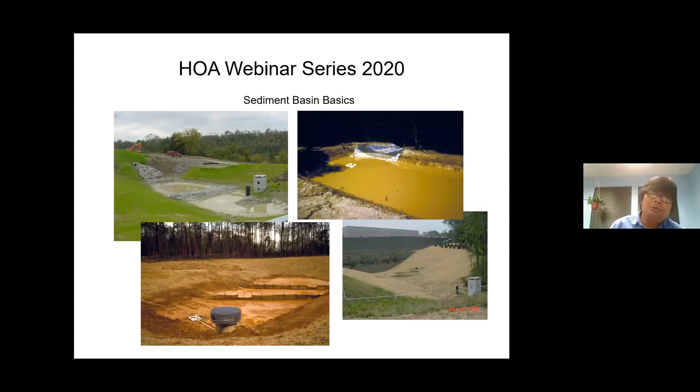So with that said, what we do with sediment with basins, these structures start out during construction. We use these as sediment basins. The reason for that is that the Ohio EPA mandates that sediment settling ponds are required where stormwater collects or concentrates during construction.

So what we do is we retrofit these detention basins with a slow release device called a skimmer that is to regulate the discharge of muddy water that's run off from the construction sites, and it's supposed to hold it and draw it down with a minimum of 48 hours. These skimmers and sediment basins must be installed and functioning within 7 days of grubbing on a construction site.

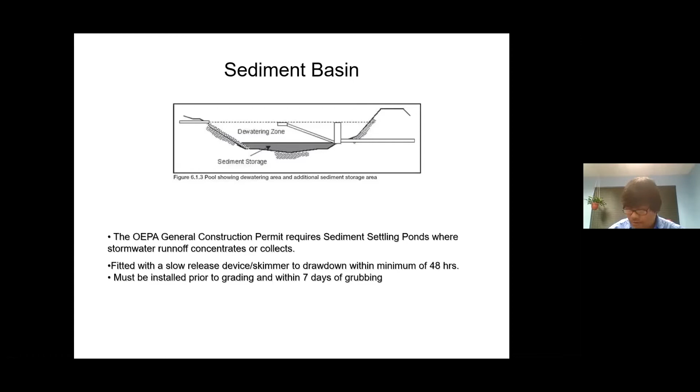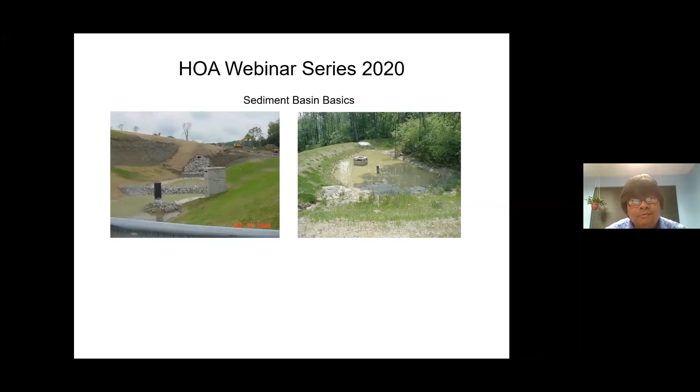I just want to illustrate a couple of pictures of a working sediment basin. That pipe sticking out is the slow release device that controls the discharge of water from the basin. Basically it allows the muddy water, sediment from the muddy water, to settle down and be captured in the basin and not be released into the streams. These pictures just illustrate how much sediment can really be captured in those sediment basins.

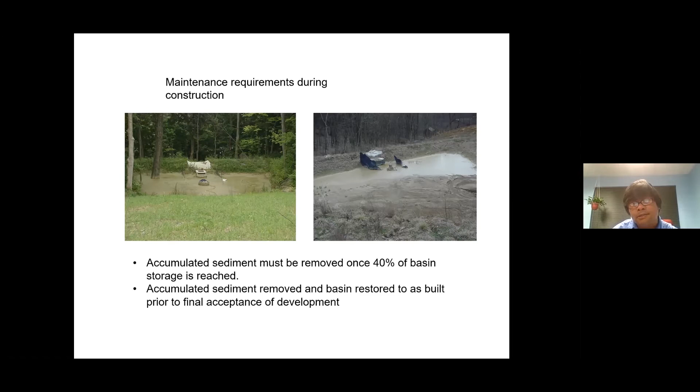We do have guidelines on when they should be maintained. One is the accumulated sediment must be removed once the sediment has reached 40% of the storage volume of the basin. The other trigger for maintenance would be when the sediment must be removed and the basin restored to an as-built condition prior to the final acceptance of the development.

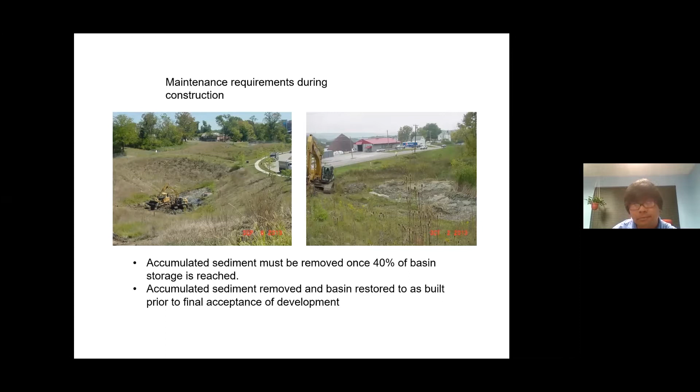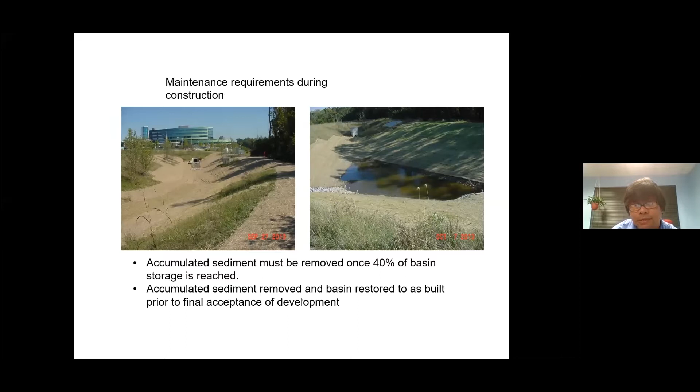Just a couple of pictures illustrating how this basin maintenance is sometimes a very involved task, needing the right conditions and the proper equipment. But that is how we want to leave these basins when we are done with them on a construction site. So with that, I would turn it over to Ben, and Ben would be the person that will discuss the functions and maintenance of these basins. Thank you.

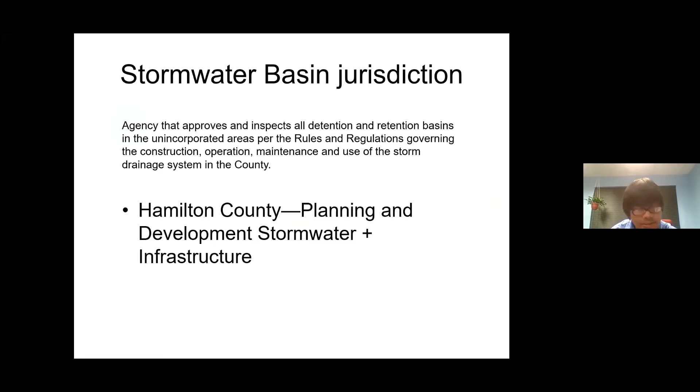All right, thanks, Jay. I am Ben Poole. I'm with Hamilton County Planning and Development, and my main role is stormwater plan review for all new developments in Hamilton County, as well as dealing with different inspection aspects of basins once they're completed. Let me pull up my screen here.

So I'll start with what is a detention basin. This kind of goes off what Che was talking about with sediment basins, which are only used during construction. Once we get towards the end of a construction project and the land has been stabilized with vegetation and grass, so there's less erosion, they will transform it into a detention basin and clean out the sediment, and that'll be its permanent use from now on.

Detention basins are used to capture the runoff from a development, usually through the storm sewers, or they can be directed there from surface flow of water.

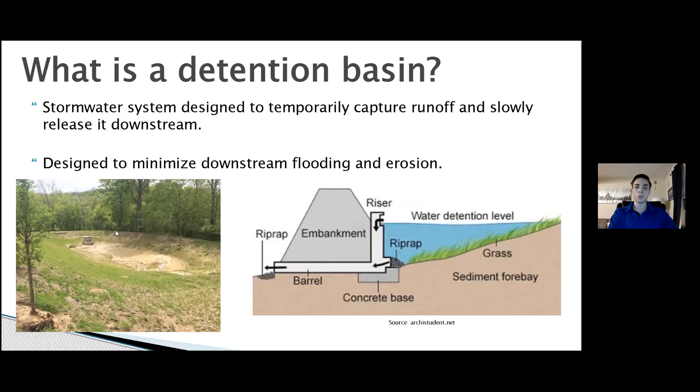There's a pipe that goes under the dam, and it will let the water go where it was previously flowing, usually to a small stream or creek, or sometimes to other storm sewers if it's closer to an urbanized area.

Detention basins are needed because with urbanization and new developments, you go from grass, trees and bushes, where a lot of water infiltrates into the ground and is used by the plants, to roofs, sidewalks, roads, etc., where the water runs off and goes to storm sewers a lot faster. There's also a larger volume of runoff because there's not that infiltration into the ground.

And also there is the issue of pollutants, whether that be trash, sediment, like Jay was talking about, oil, or say fertilizer from lawns. That's all stuff that you don't want to be getting into the waterways.

Generally we'll have three different detention basin types and subdivisions. I'd say 90% of the basins, especially in Hamilton County in a subdivision, are going to be a dry pond detention basin. Within a few days of a rainstorm, these by design should be totally dried out, and they will only have water during rain events or shortly after.

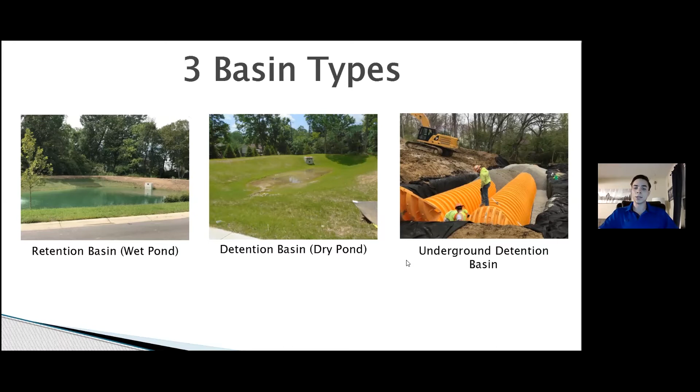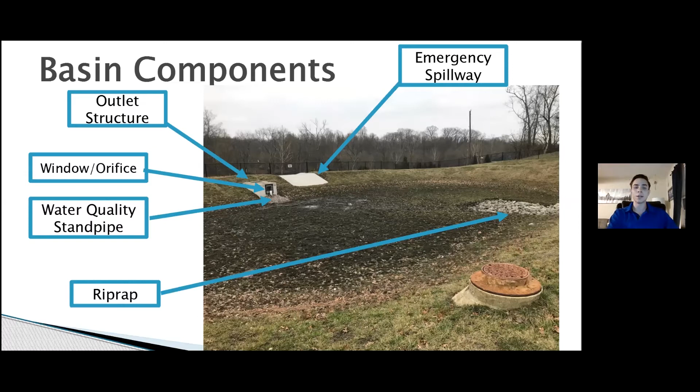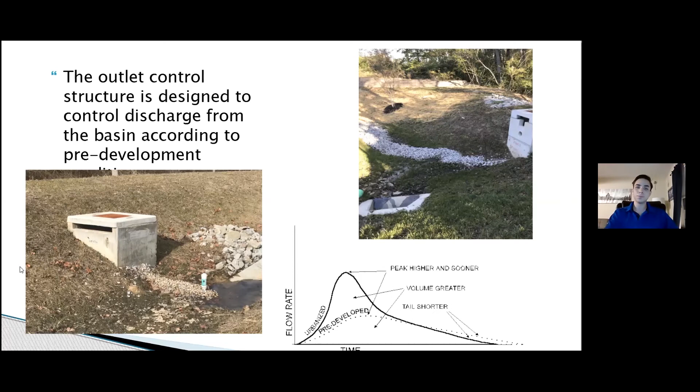Basins in Hamilton County, Ohio, and really all over can be designed for stormwater quantity runoff control, which is for flooding primarily and erosion, and these will normally let out more water faster. We also have water quality, designed to hold water in longer to get more sediment and pollutants out before releasing that water downstream of the development. Now all developments over 1 acre in Ohio are required to design for water quality.

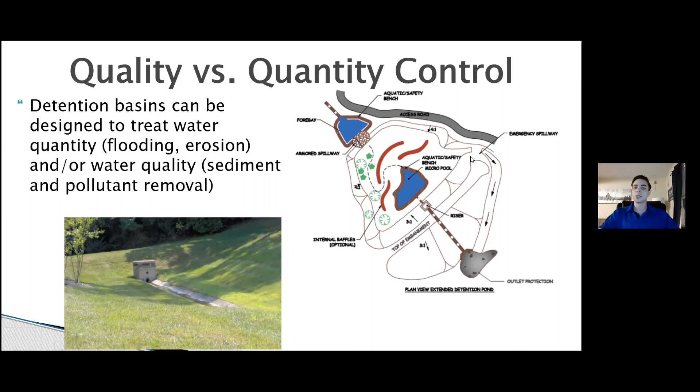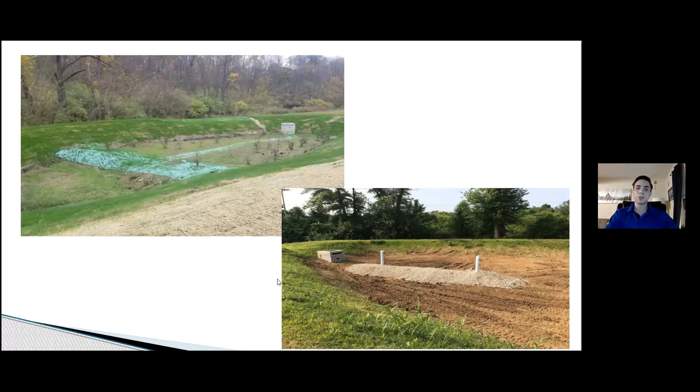So who is responsible for these basins? In Hamilton County, all detention basins are owned by either the property owner where it's sitting, or an HOA if it's in a subdivision. In 2007, we changed our regulations to require an HOA to be responsible, required for all new subdivisions. Before 2007 that wasn't the case, and there shouldn't be any after that. But before, there will be some subdivisions where a detention basin is the responsibility of the whole HOA, and others where just the property owner who owns that lot would be responsible. This is determined by the subdivision record plat, which is on file at the Hamilton County Recorder's Office, or the Recorder's Office for other counties or jurisdictions if you're not from Hamilton County.

These can also be found online, and I'll talk about that in a little bit, or if you needed help finding them for your subdivision, you could contact my department and we could help you out with that.

Now we'll get to some common issues with detention basins. They all kind of build off each other in a way, and maintenance overall can be less of a big deal if it's more frequent minor stuff, just keeping an eye on the basin, rather than letting it go for 2, 5, 10 years and then trying to fix it all at once. The main issues are normally overgrown vegetation in the basin and around the outlet structure, and also trash and debris, because anything in somebody's yard next to a drainage swale, or in the street, that gets washed down into the sewers is going to end up in the detention basin.

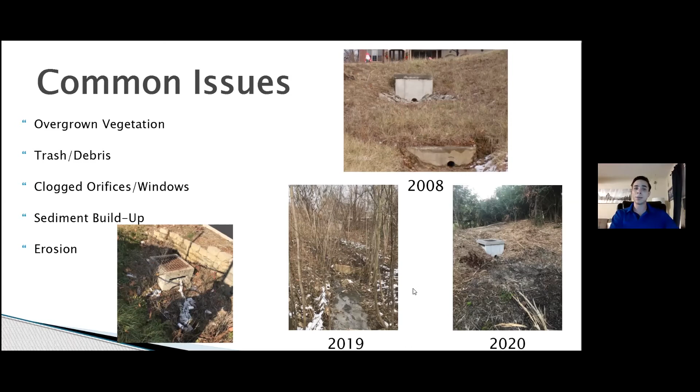So this kind of touches on what I said earlier, that frequent inspections and routine maintenance can prevent the more expensive and bigger problems down the road.

What we typically suggest is monthly inspections, and then after any large rain event or storm, go inspect the outlet structure and the pipe downstream and any of them in the basin, just to make sure nothing has washed into them or clogged it up. Then also a few times a year, and again after large storms, inspect for trash, debris, big tree branches, anything like that, and clean it out of the basin so it doesn't clog anything up or cause issues. Also look for erosion, sinkholes, animal burrows, and check the dam.

Those can cause issues if they're not caught, and could eventually cause dam failure. If you see erosion where there's no grass, it's as simple as filling it in and putting some grass seed on it. Or if it looks serious, you may need to have an inspection done.

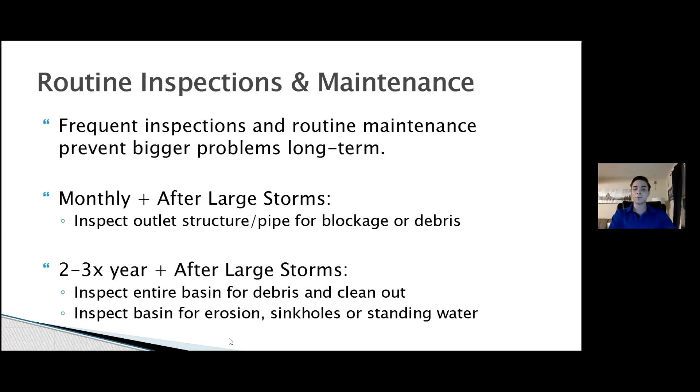For vegetation management, if it's a grass basin, which most of them are, it's good to mow it a couple times a year and not let it get too out of hand, because more vegetation can clog things up more. But you don't want to cut it too short either, because longer grass provides more filtration and also decreases the likelihood of erosion in the basin.

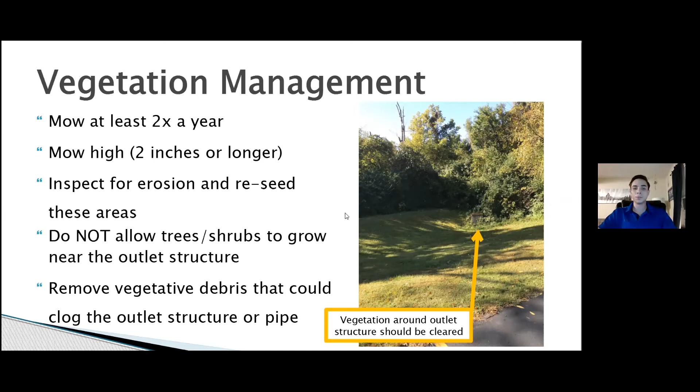Then there's sediment removal, which typically, no matter what, needs to be done every 5, 10, or 15 years. That depends on where the basin's located, how big of an area is draining to the basin, and how much sediment is getting in there.

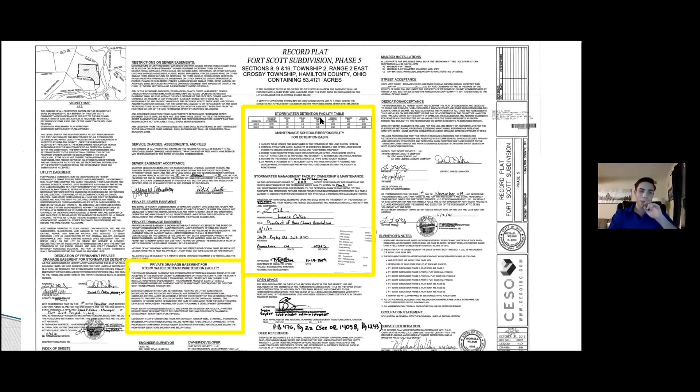And then additionally, at the end of each project - getting ahead of myself - this is the second page of that same record plat from the previous slide. This shows all the lot lines, the street here, and the private drainage easement.

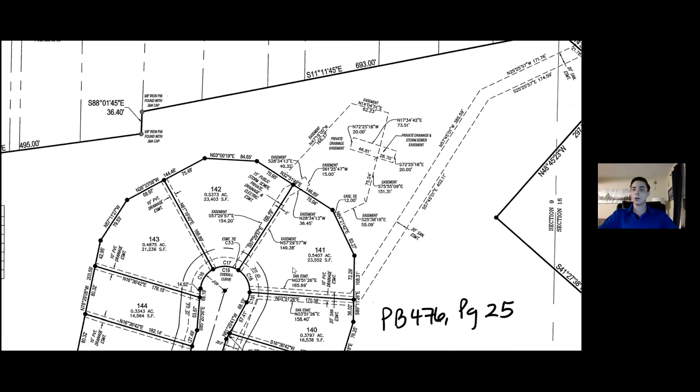So really, if you're wondering if there's any storm sewers or drainage swales on your property, they should have an easement from when the subdivision was designed, and these would all be shown on the record plat for your subdivision. And then lastly, for each subdivision and detention basin, before we accept it, we require an as-built of any public storm sewer and any detention basin.

So any basin within likely the last 20 years, we would have an as-built on file. And if not, we would be able to find some plans, so we would at least know what was approved with the design of the subdivision. And so this would be useful if you ever needed maintenance done or just to check and make sure everything's all right.

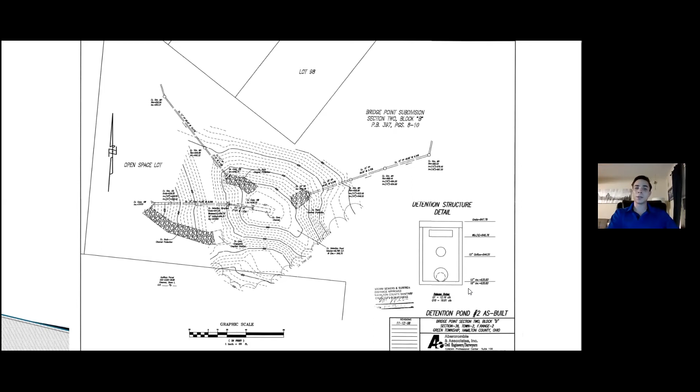And some additional resources: if you go to Clermont County, you can Google this, they have a really thorough manual on detention basin maintenance. It goes over a lot of the basics of what I just talked about, and also provides a schedule of what maintenance should be done. And I think they even have a maintenance checklist, which will help HOAs have that on file and log who's doing them and know when you've done inspections and what was wrong and what to watch for.

Ohio EPA has a similar manual on their website for maintaining stormwater control measures, which is generally going to be detention and retention basins. You can go to the Hamilton County Recorder's website to find record plats for your subdivision with that information. And then also you can contact our department, or on Hamilton County's website, where you can find all our phone numbers and emails.

And this is our general line number right here. And you could call us with basic questions on the detention basins, but even if they're specific to your subdivision, because we can look at that in-house, see how it was designed, and then also we can provide you plans or as-built or record plats or any other information that we may have on file for your subdivision or detention basin. And that's all I've got.

So I think I will pass it on to Adam, and he can go over some retrofit stuff.

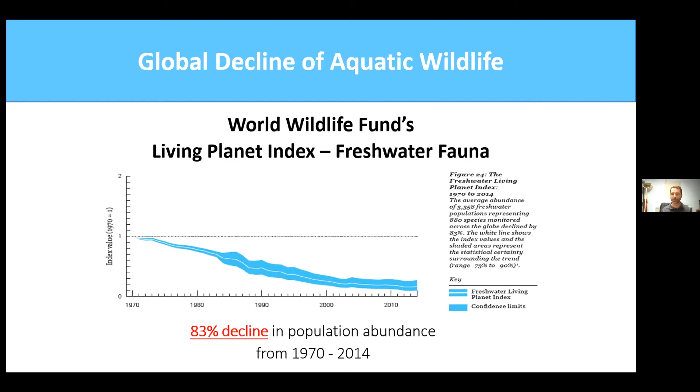Because we're not talking about since colonization of North America, we're not talking about the dawn of the Industrial Revolution. This is the last 50 years, an 83% decline. So that's, I would hope, offensive to the sensibilities of many people.

Moving locally, the information we have to glean is based on the Ohio Department of Natural Resources, which creates lists of species that are extinct, extirpated, endangered, threatened, and of concern for each county. So basically, the species that are gone and in not great shape. This is the list for Hamilton County, and if you start digging into it and really looking at what species are included, you see that 77% of them are dependent on stream and wetland habitats. So the point here is that aquatic wildlife is really taking a large portion of the brunt of the decline in global and local biodiversity.

So with this in mind, thinking locally, the question becomes: what exactly is the problem here in Hamilton County where we have some power to do something about it? And we're lucky here to have this wealth of information on the condition of our streams as a result of the Metropolitan Sewer District's consent decree. They commissioned the Midwest Biodiversity Institute to do these very detailed studies of our streams throughout the county.

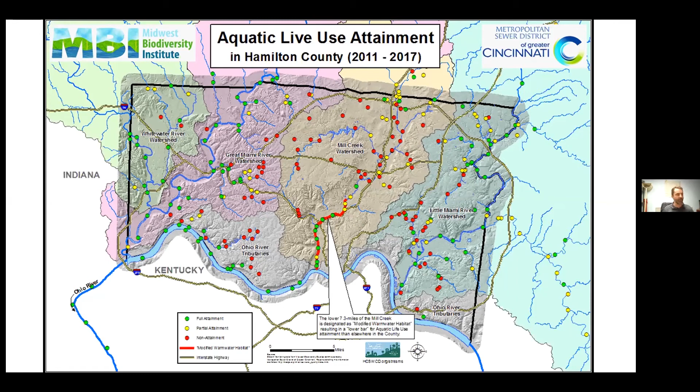So, long story short, there are several things impairing our streams. But as you dig into the data, it becomes clear that there is one item that is the most widespread, ubiquitous problem. It's also the most foundational problem, meaning that even if you addressed all the other problems, you're not going to make much progress in restoring the biological condition of these streams unless you address this one foundational issue first. And that's altered hydrology.

So we have developed this area. We are in an urban county. We have covered the surface with impervious surfaces like roads, parking lots, and buildings. There are two faces to this same coin. When you don't allow water to soak into the soil because it's covered in asphalt, you don't get that water recharging the groundwater. And the groundwater is really what provides the flow to these streams, particularly the smaller headwater streams, in between rain events.

And so you get streams drying up. There's a stream like this one, with a drainage area of probably 3 miles. It's a pretty large stream, and it frankly should be supporting perennial pools that support fish. When we see something like this, it's not a degradation of aquatic habitat, it's a complete loss of aquatic habitat.

As I mentioned, this side of the hydrologic alteration impact is particularly acute with headwater streams—those with drainage areas from 20 square miles down to 1 square mile. The thing is, those represent the vast majority of stream miles here in the county, more than 85%. So this really represents a huge loss of available aquatic habitat locally.

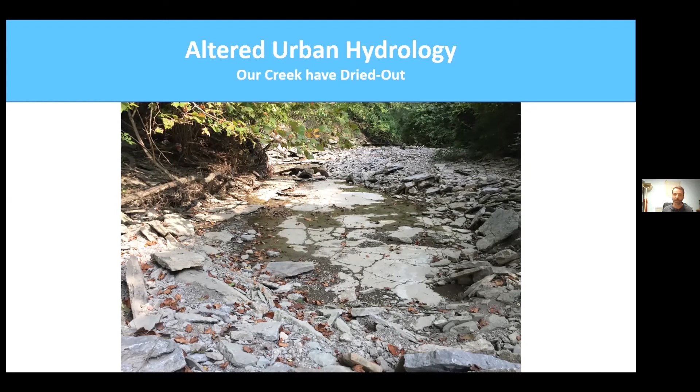Now, the other side of the coin is that we have this increase in the frequency of erosive flows. The water hits the pavement and goes straight into the sewer. We've got these hydraulically efficient pipes and ditches delivering it straight to the stream. The result is that pretty much every time we get a decent rain, there are major erosive flows in the stream.

And so this has a direct impact on the biology. These are erosive features, and the organisms that evolved in them evolved to handle these types of disturbance, say once, twice, 3 times a year. But when it starts happening 20 times a year, that's ecologically significant, and we're finding that it greatly limits the organisms that can survive in these systems.

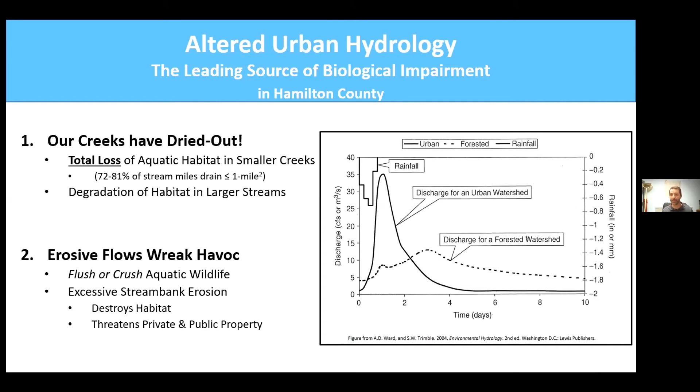There's a multi-family unit, maybe 10 or 12 units, that has just been evacuated recently in Anderson Township. Major economic ramifications there.

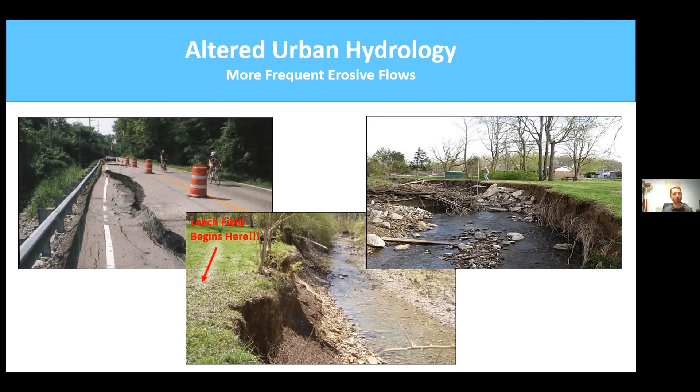And it also creates societal problems from impacts to roads, like you can see here, and other utilities as well. So where do detention basin retrofits come in?

The detention basin retrofits represent a huge potential in terms of efficiency, how impactful a project can be for the acreage you're working on and for the dollars you have to spend on it.

Because we have these basins that were designed so that large swaths of impervious surface are delivered to them. As described, these things were originally created as flood mitigation measures, to reduce flooding downstream. Recently, they've had water quality components built into them. But what they're not designed to do at all is reduce the erosivity of flows coming out of them.

But the shame of the matter is they could really easily. It wouldn't necessarily require larger basins or a huge amount of extra design work beyond what's already being done. But the fact is it's just not currently required by local regulations. That may change in the future, may not, but either way, in this historically developed county, we have a huge amount of legacy detention basins that can be retrofit relatively simply and easily.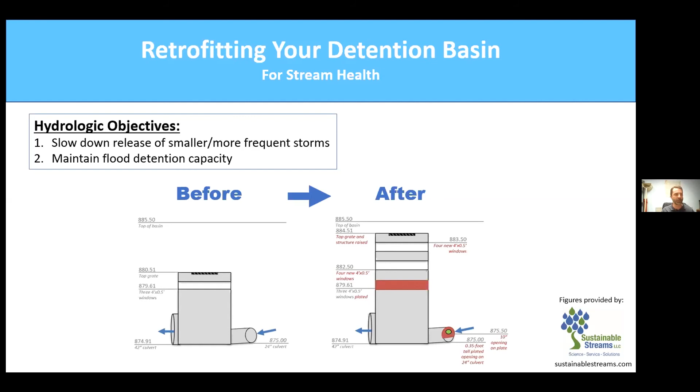A point to be made here is that we're not talking about trying to detain these huge events, because we're trying to reduce the frequency of erosive events. So perhaps events less than a 1-year return interval, maybe up to a 2-year return interval event, can be detained and still drained within 24 hours, maybe a little bit more. And it wouldn't really change the functionality of the basin very much.

So what might that look like? In this most basic example, we've got the before image where we've got this low flow orifice down here that's kind of buried. Maybe Ben would say we've got some maintenance issues here. So what did they do here?